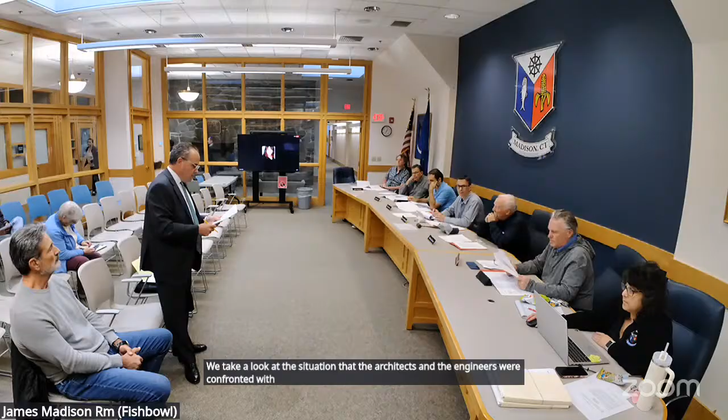Specifically, the lot itself is non-conforming in lot area. It's 9,275 square feet, where 10,000 square feet is required. The minimum shape that needs to fit in there is an 80-foot square, only a 42.8-foot square fits.

Most importantly, and notably, the lot width here is 42.4 feet, where 80 feet is required. So if you look at a 42.4 foot wide lot and you take two 12-foot side yard setbacks, taking 24 feet away, you're left with a building envelope that is 18.4 feet wide on a waterfront lot. I haven't seen one with that narrow of a building envelope, and it's pretty easy to see when you just look at the GIS map for lot 23 here.

The lot next door has a flange out, so it has more buildable area out near the water. And just a simple drawing that I did on our site plan, which is part of the record.

Do we have those materials? Not my markups, I'm happy. I'm just showing them to you now. Okay, you have this plan. If you're presenting them with markups, they do have to be submitted, do they not? I can submit them, yeah. Sure, I mean, it's more—I think they just give context in terms of the overall lot and the building envelope being very unique.

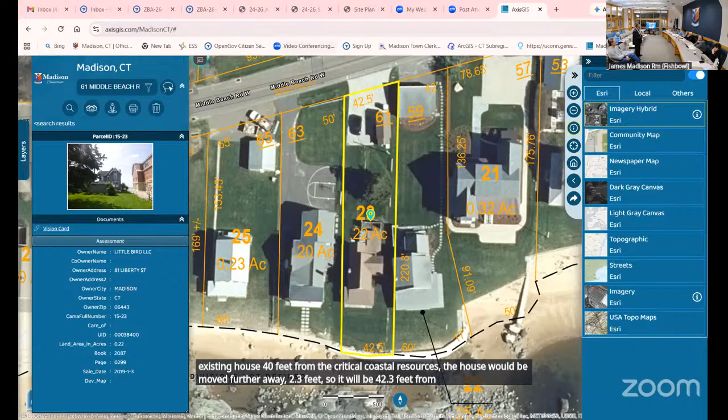In order to do all that, the variances required are the two side yards, 7.2 feet on the east and 8.1 feet on the west. Those represent reductions of existing nonconformities of the existing house. The critical coastal resource setback, section 2.17, although we're making it better and further from the house, 50 feet is required and we are proposing 42.3 feet. So those three variances we're requesting represent reductions in existing nonconformities.

The remaining three are ones we typically run into when we have a situation like this: a unique shaped lot and the need to raise to FEMA standards. We have a 5.9 foot average elevation here, and so we have two height variances: one for average building height, we're requesting 32.5 feet where 28 feet is allowed, and for total building height, we're requesting 37.3 feet where 36 feet is allowed.

The last one is floor area. I've been in front of this board seeking floor area variances in FEMA raised situations because in this particular proposal, we have 1,354 square feet, which is area beneath the lowest point of the first floor joists once raised to FEMA. Our regulations, when you close it in, require that to count toward floor area.

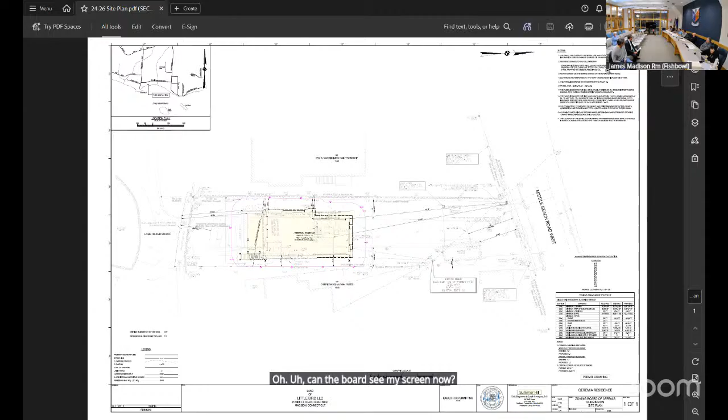Okay, so this is the site plan that was submitted as part of the package. I don't know if you've had a chance to take a look at it. I'll zoom in a little bit here for orientation. Middle Beach Road West is on the right of the sheet and the sound is on the left, and north is pointing to the right. Yeah, there's the north arrow there.

So the house is pretty straightforward, not a lot to tell you, but the house is oriented north-south along the same lines as the existing house, and the new house is also moved northerly, away from the water, away from the sound, just a hair over 2 feet. The limits of the new house are shaded in yellow on the plan. These purple lines and numbers are for the computation of the average grade elevation, which is also on the plan, I'll zoom back out, on the right-hand side of the sheet.

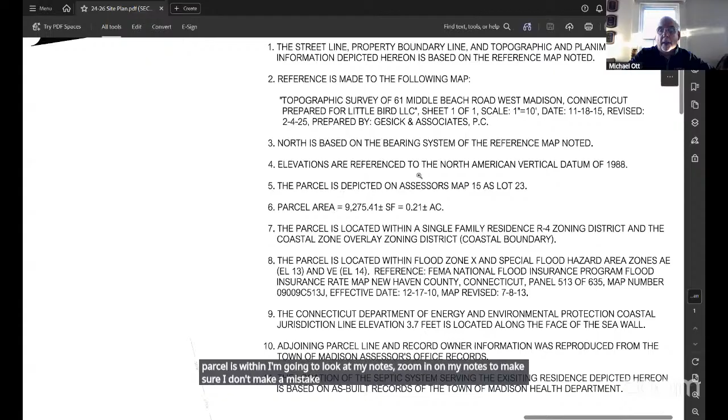The coastal resources on the site are general coastal resources, which are applicable in all municipal coastal site plan applications, and coastal hazard areas, meaning the special flood hazard area zones that the parcel is located within. Bear with me one second. You can see that the parcel is located within both an AE elevation 13 special flood hazard area zone, as well as a VE elevation 14 zone, identified in note 8 on the sheet.

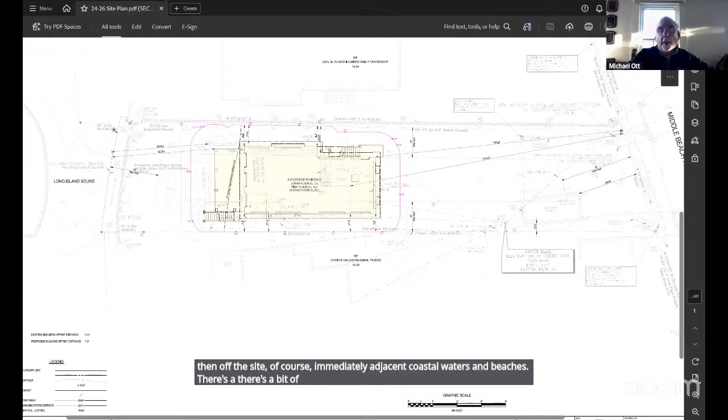So again, the coastal resources on the site are general coastal resources and coastal hazard areas, the special flood hazard area zones, and then off the site, of course, immediately adjacent coastal waters and beaches. There's a bit of a beach along the frontage. I think that's really it in a nutshell. There's no anticipated adverse impacts to coastal resources by the project.

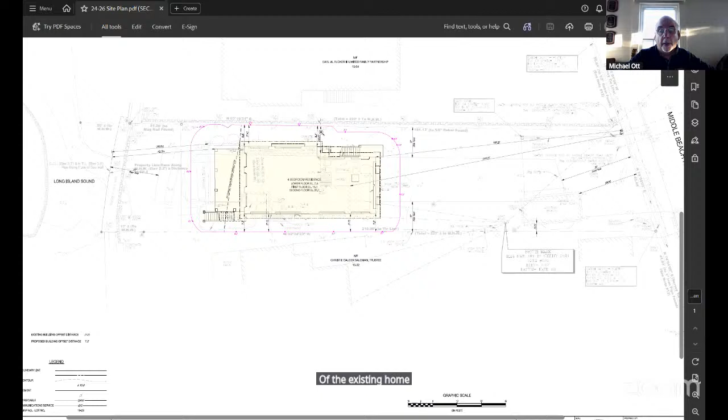This is pretty straightforward, it'll be the demolition and removal of the existing home and the garage up front, as Attorney McCann explained. I can zoom in a little bit. I don't know how clearly you can see this on my screen, but the garage is here, where my cursor is moving. As you can see, it's very close to Middle Beach Road West, and as Attorney McCann explained, it's partially within the front yard, which is not allowed under the zoning regs.

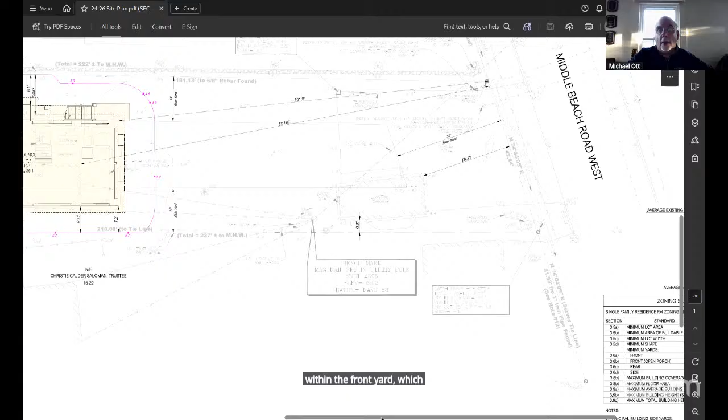I think that's it, again pretty straightforward. I'd be glad to answer any questions the board may have.

So I have a question. The elevation of the first floor due to FEMA requirements, what is that elevation?

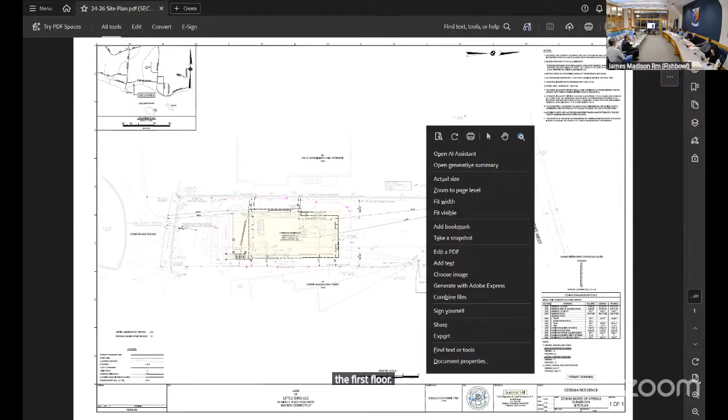You can see, I'm zooming in here, hopefully you can see this. And Dillon, the architect, can jump in here also, but because the new home, as well as the existing home, is partially within the VE elevation 14 zone, under the town's floodplain management regulations as well as FEMA's regulations, that means the entire structure has to conform with the more conservative zone, the VE 14 zone, and that drives a minimum first floor elevation of 16. As you can see, we're just a tenth over, a little over an inch over the 16, at 16.1.

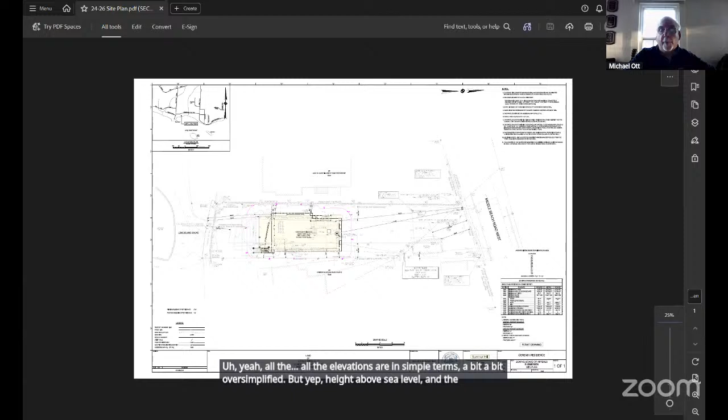What's the meaning of the lower floor elevation? That's height above sea level. Yeah, all the elevations are, in simple terms, a bit oversimplified, but yep, height above sea level. That lower floor, as Attorney McCann described, is the enclosed area below the base flood elevation that can only be used for parking, storage, and access to the upper floors of the building, as you know.

So basically ground level is 7 feet above sea level, in fact. 7.5, yes. Well, we've got to be up to 16, so you need 9 feet roughly from the ground. And again, Dillon Parker, the architect, I'm sure he's going to explain that in detail when he presents to you.

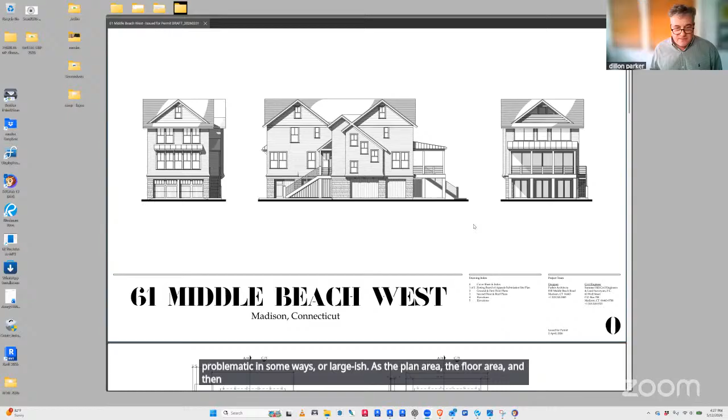for the variances that seem to be problematic or large-ish are the plan area, the floor area, and then also the height. So for that, I thought it might be appropriate to walk through the plans.

As both Chris and Mike have described, the ground level plan on the right here has two garage doors in it. It is constituted of structural piers of concrete that lift the whole house up, as we've described. Then there's a storage area in the front, with a little bit of access on the interior so you can come in and out.

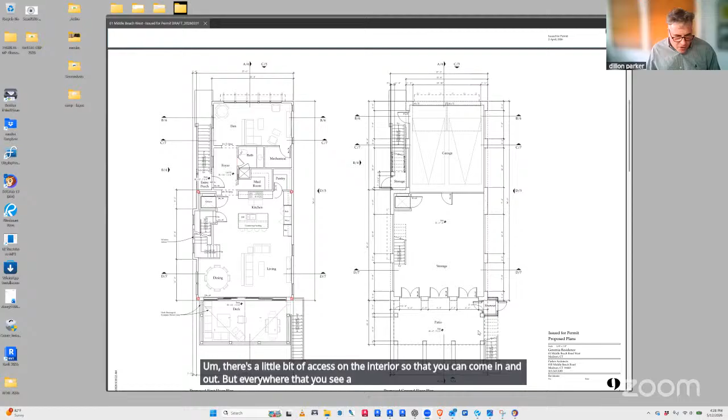But everywhere you see a thinner portion of wall - why can I not zoom? Oh, here it is - everywhere you see the wall thinning out like this, if it's not a door, as it is in this location, it's a breakaway panel. The structural engineering of that will allow a storm surge to just take it through and not knock the house over.

So we like the infill panels, as Chris described. To see a house just standing up on stilts is, I suppose, common architectural language in some places, but it isn't actually common in Madison. So we've made some effort to try to make the house look like a house that isn't just up on stilts.

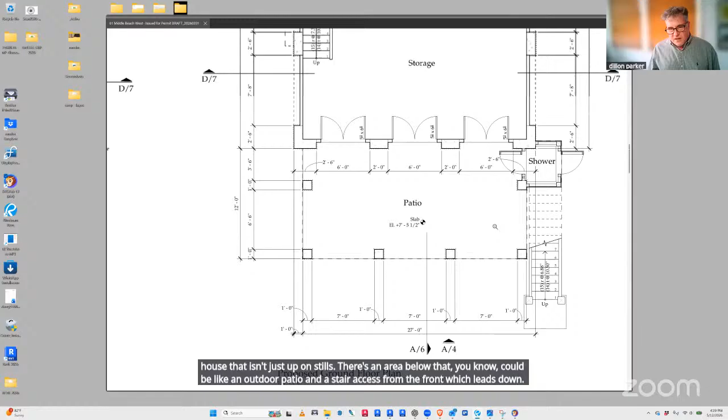There's an area below that could be like an outdoor patio and a stair access from the front, which leads down to the shore. But again, all this area here is enclosed, but it's technically not living area - it's unconditioned space, so it's not like the rest of the house.

The rest of the house area, we had to walk a fine line of balance between fitting on the site and making sense, but also providing the client with the function they want, with the program they want.

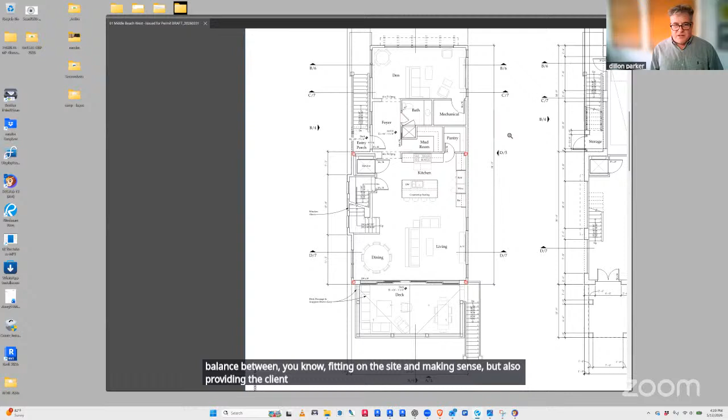And in doing that, I would say this is kind of a conservative house. I mean, there aren't any areas of it that are especially large or grandiose. So you can notice here on the first level that you come upstairs to a fairly modest entry. There is a den room in the back for TV watching.

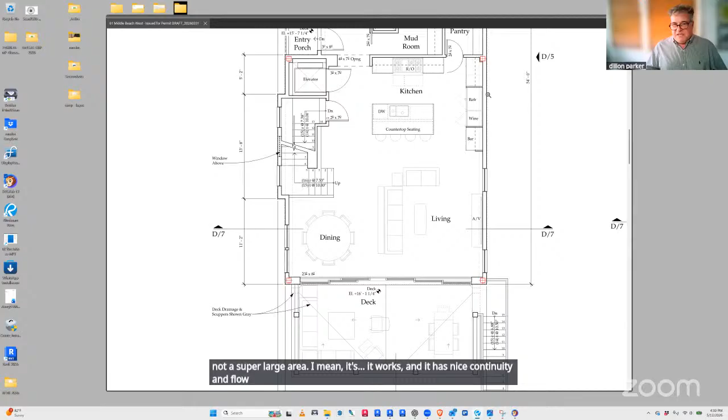There's a modest half bath, a mechanical space that we need for the building. The kitchen, living, dining is not a super large area - it works and has nice continuity and flow, but it's by no means oversized or grandiose. And then it opens up to the front out to a deck so the client, his family, and their guests can take advantage of being out there by the water.

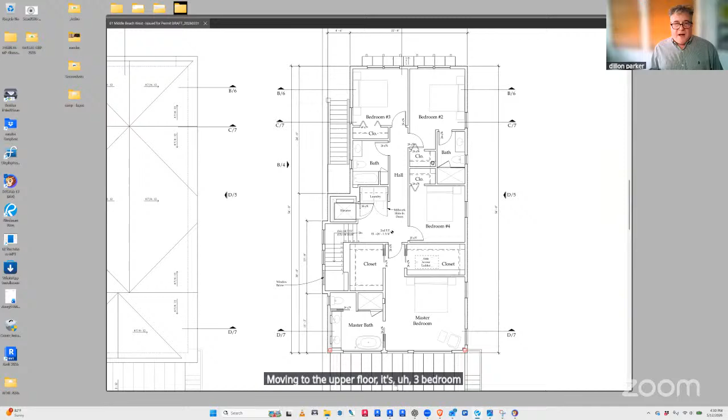Moving to the upper floor, it's 3 bedrooms. Again, just for the constraints of the house, bedrooms 2 and 3 in the back face out towards the north, towards the road, Middle Beach West. They're actually rather small bedrooms by most people's standards - they fit tightly in the space, but they're a little on the small side for the kind of standard, quality, location, and type of residence.

There's an ensuite bath and a shared bath, and the master suite actually has its own closet and bath. Actually, let me back out - oh sorry, it's 4 bedrooms, I forgot. There is an inboard bedroom here, also not extra large - these are all modest bedrooms.

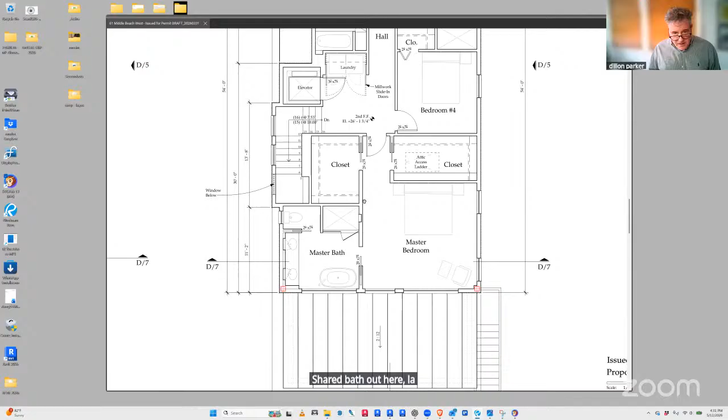Shared bath out here, laundry on the floor, and then a master suite in the front that looks out to the ocean, to the sound. A couple of closets, and then a medium-sized master bath, but efficient and tightly put, and a nice size master bedroom, but not overdone.

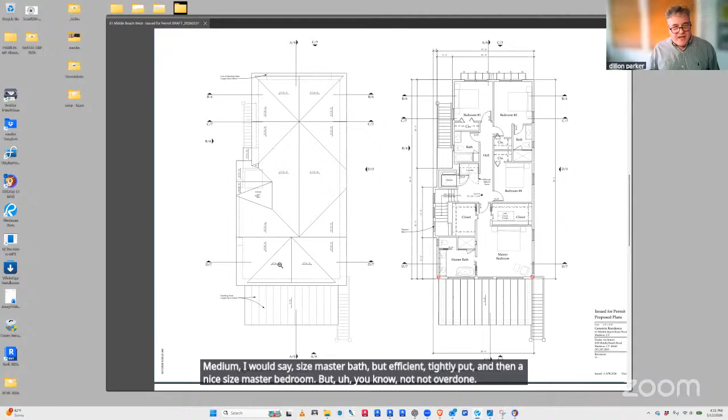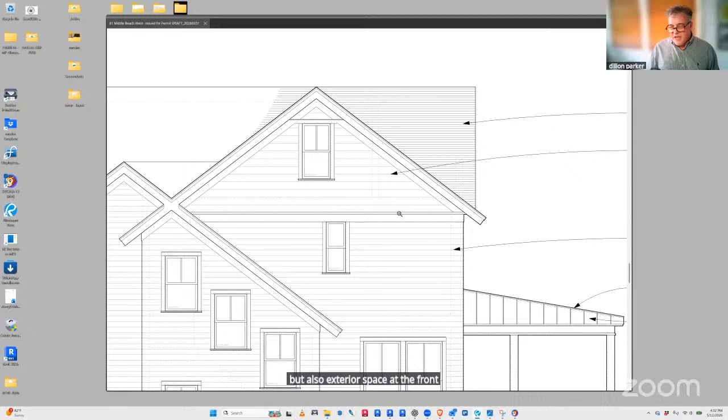There's a roof plan here. There is attic space above this, which I can describe a little bit in the elevations. One of the key things, and Chris raised the issue already, is at the attic level there's room up above for mechanical equipment, but also exterior space at the front for exterior mechanical equipment like the compressors you need to run heat pumps for your HVAC system.

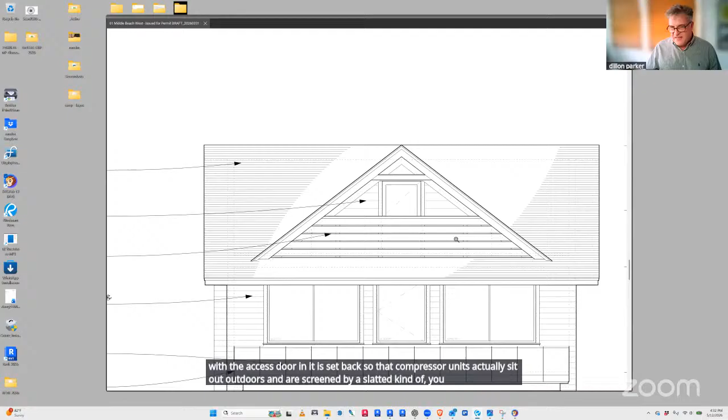So the strategy here was to find a place that is exterior to the building but shielded from anyone's view. This would be the view from the west neighbor. So the roof here is in the way of the west neighbor seeing any of the outdoor mechanical equipment. On the front, under the gable, it's actually a setback. This wall back in here with the access door is set back so that compressor units sit outdoors and are screened by a slatted fence element that prevents anyone from seeing them directly. And the roof comes down on both sides, so the only acoustic exposure is out in the direction of the sound and not laterally to either of the neighbors. So that's kind of how that works.

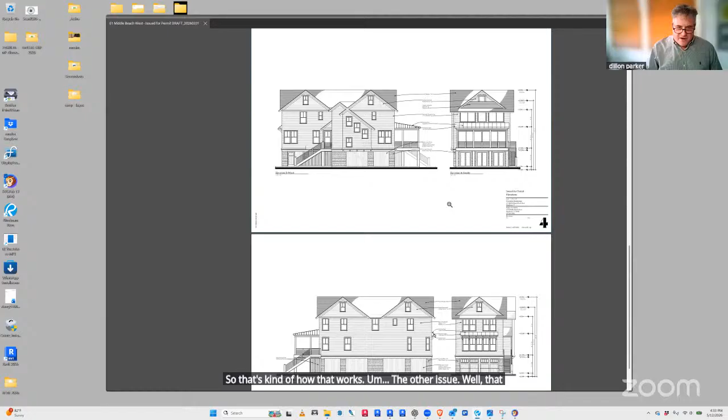The other issue is that the variance is being asked for about height. We took the approach with this building that we wanted very much to look contextual. The pitching of the roofs is not super steep, but steep enough that it's consistent with lots of other buildings all along Middle Beach West and throughout Madison, with the exception that we had to go a little shallow over here for the front porch, but that's not unprecedented either. The overall massing of the house, we wanted it to look in keeping with the houses around it.

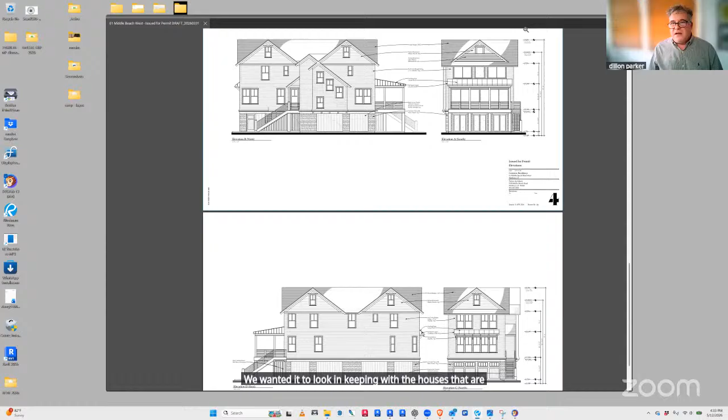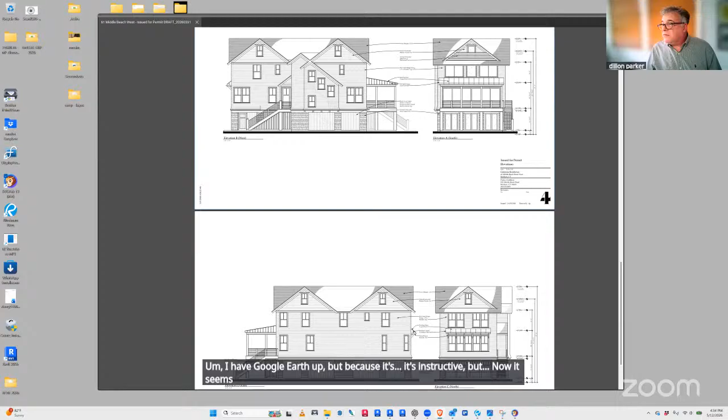Where did it go? Hold on one second. I had it on you, and it disappeared. No, I had Google Earth up, because it's instructive, but now it seems to have gone somewhere. Oh, here we go.

So that's kind of where we were headed, and those were really the big aspects that we thought were worth talking about. And with that, I'd throw the floor open to questions.

No, Attorney McKeon, did you have your presentation? Start asking questions or? At this point, I field questions from the board, from the public, from anybody.

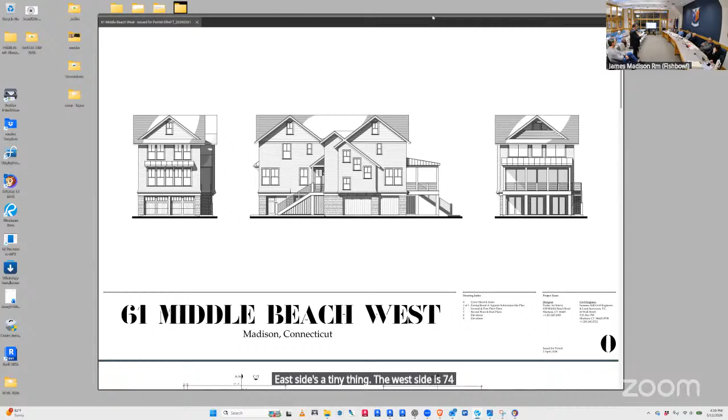But when you look at the location of the house, it is being moved further from both neighbors. You're only talking about a 12-foot side yard setback here, so a foot means a real lot in this neighborhood. On the east side it's a tiny change. The existing house currently is 7.1 feet on the east and 7.4 on the west; it's going to 8.1. So the house is being repositioned on the lot.

Not to mention further from the coastal resources. But I'm not going to disagree with you that removal of the garage is a significant factor here in making the lot more compliant from a zoning standpoint. No question about it.

In order to reduce the nonconformities further, was there any consideration to move the whole house back 7.7 feet to meet the 50-foot coastal resource requirement? Would that be a consideration if the house is being completely rebuilt? I can let the architect answer that, but I think I know the answer: the houses are built along that road, and if you move your house back, you're compromising your ability to see the water.

You're compromising your ability to see the water. You have other houses located closer to the water. There's also the idea of keeping the houses with some degree of consistency along that street. Perhaps Dylan could weigh in, but in fact the neighbor to the east raised the question about whether you were going to move the house closer to the water for that very reason.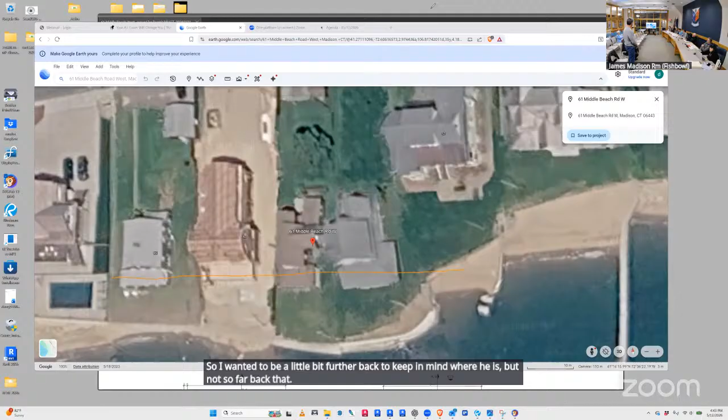I was okay with that. I wanted to start where he had set a precedent — the new Earl Puckett house set precedent by building new, and I kept it by moving mine back too. To put my house way behind that, I don't think anybody in the whole strip, if you spread that out on Google Maps, would do. Nobody's done that. So I wanted to be a little further back to keep in line with him, but not so far back that it would really jeopardize the view and be weird relative to the adjacent homes.

Where's the septic in this? Is it on the street side? No, it's on the other side, the water side. Oh — and that septic was designed and engineered less than 6 years ago. It's a brand new septic, code compliant. And you comply with coverage, right? Yes, I did.

Steve, do you have any?

You like that? I always have things. I just never.

I think a question just popped up, because Mr. McGinn, you did just bring it up. How high, if for whatever reason we ended up denying it, does the applicant have the capability of raising the existing house without it currently?

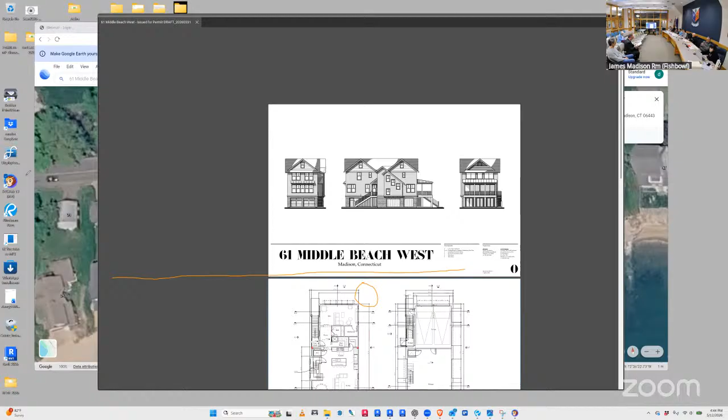It is in my narrative, but the existing house could be raised to 2 feet above the required FEMA elevation, so it could have an average building height of 32.8 and a total building height of 37.3. And we're seeking 32.5 and 37.3, so essentially the same on the total height.

Okay, but regulations allow for 2 feet above FEMA, and in essence currently aiming for almost FEMA. Only as to existing houses, yes. Got it, okay, I'm trying to understand.

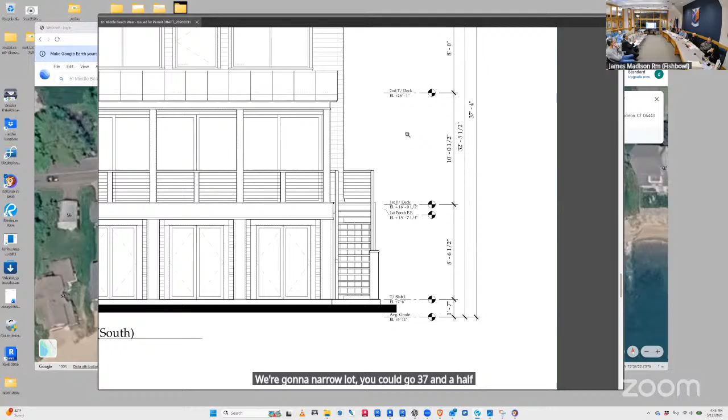And that's without taking into account the narrow lot reduction. Does that change the numbers? If it were in a narrow lot, you could go to 37.5 feet. But I do think under section 2A 1.5, which is raising of an existing house, you can go up to 2 feet above the FEMA level and 2 feet above the permitted height. It is addressed in that particular reg. Floor area is not addressed, but height is.

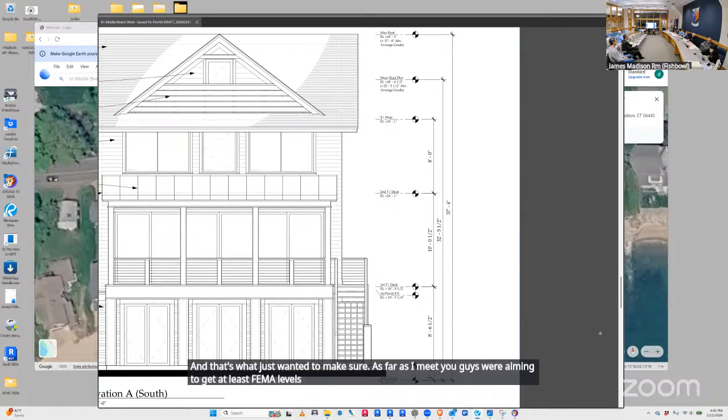Okay, so those are the numbers of what you could raise to, and that's what I just wanted to make sure, because as far as I knew you guys were aiming to hit at least FEMA levels, if not a scooch above, to presumably make room for cars or that kind of aspect. But you did just mention that you had the legal right to go even higher than that. It was like, okay, how much higher than FEMA are you normally allowed to go? So thank you, sure, as far as that one.

Now, if you didn't have the breakaway sides on the lower floor, does that floor area still have to be counted? No. Okay, so it's the breakaway sides that, wanting to have those sides is what makes that have to now be a factor. Correct.

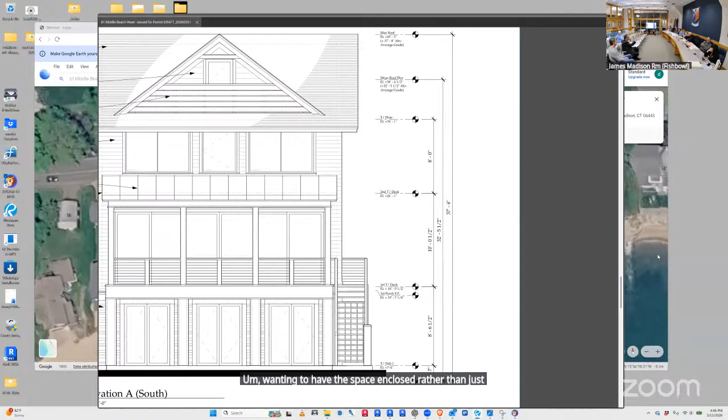Wanting to have the space enclosed rather than just a clear shot of a house on stilts. Historically Madison has had houses on stilts, so I'm used to seeing them that way. So just making sure I'm fully understanding, wanting to be able to enclose that is indeed making it an interior space, and therefore accepting that floor space is going beyond what is currently allowed, and accepting that fact. Okay, just making sure I'm fully understanding it.

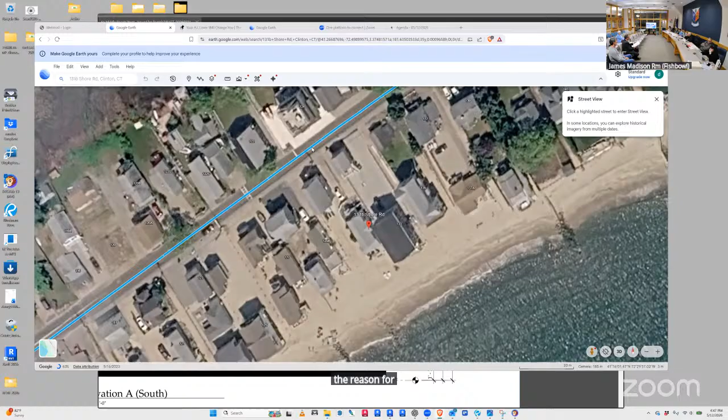The reason for that, and sorry, that was the question I had. Okay, and we already talked about that aspect. I think at this current moment I've run out of particular questions to inquire about. I'll probably have something pop in my mind later.

Sure. So I did want to address, in your submission of the application, Attachment A as it was called, you have 2 paragraphs at the end, the traditional hardship conclusion. I don't know that I would fully agree on the statements in those 2 areas.

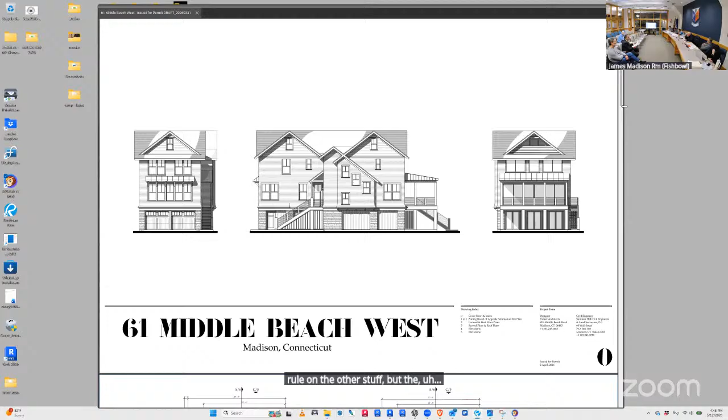We may just rule on the other stuff, but the fact that the lot is narrow doesn't automatically assume, well then we can go build something. We want to build something larger there, and the lot's narrow, so we can just do it. Is almost what it sounds like. It's almost an as-of-right thing. But because it's too narrow to have a normal looking house, we get to make it normal looking.

And I'm not sure that since there is already a house there, and yes it has some nonconformities, but that doesn't necessarily, in my mind—maybe you could make me see it differently—justify a traditional hardship.

But before I pass that on to you to address, I want to address the next paragraph, which talked about variances being consistent with the coastal resiliency plan. And thus your conclusion says it's clearly consistent with the comprehensive plan of the town. And you only addressed there the resiliency effort in making height restrictions flexible in case of home elevations. So in that regard, that does address some compatibility with somebody's plan in the town, but it's not an official adopted standard, just because a coastal resiliency plan came out of a committee.

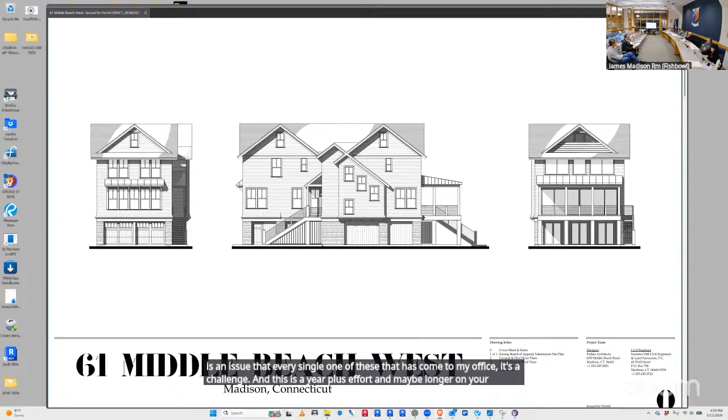This is what you're talking about — needing height and floor area under our current regulation. Hopefully they can change, but that is an issue that every single one of these that has come to my office is a challenge. This is a year-plus effort, maybe longer, on your part to try to come up with some reasonable balancing of those factors.

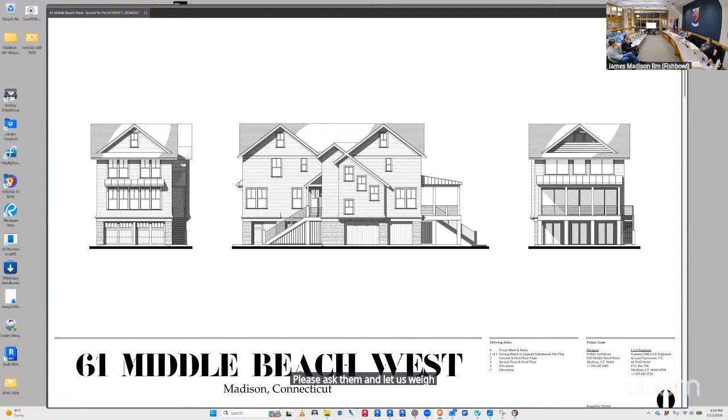The only other thing I wanted to mention is, to the extent there are questions and discussions you want to have like this before you go to deliberation, please ask them and let us weigh in, because we obviously can't once you close the hearing. That's what I was asking. Do we have anyone in the audience who'd like to speak in favor of the application?

Cecilia Pfister, I'm at 73 Middle Beach West. I have a question and I have comments. The question is about the third floor — it seems like it's more than mechanical space. That's huge, it's the size of the house. It says it's added only a ladder access, but that view out the front seems a waste for mechanical equipment. It looks like it could be living space, a porch.

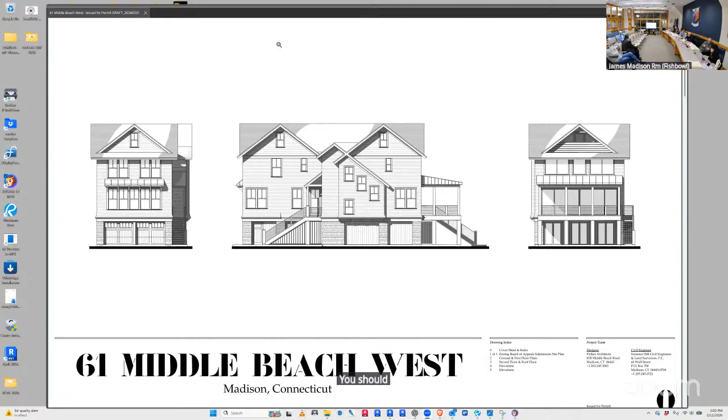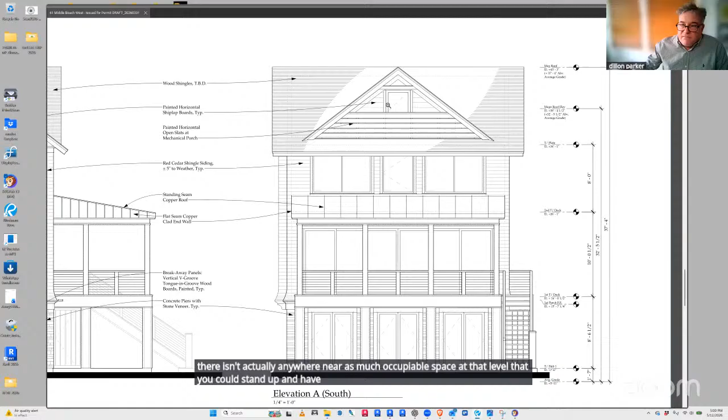You should say how high the ridge is, the floors. Sure, so we have not included a section per se in this set of drawings, but there isn't actually anywhere near as much occupiable space at that level that you could stand up and have a code-compliant head clearance. So it is definitely specifically for mechanical, and the hatch door that goes out to it is only about 5 feet tall.

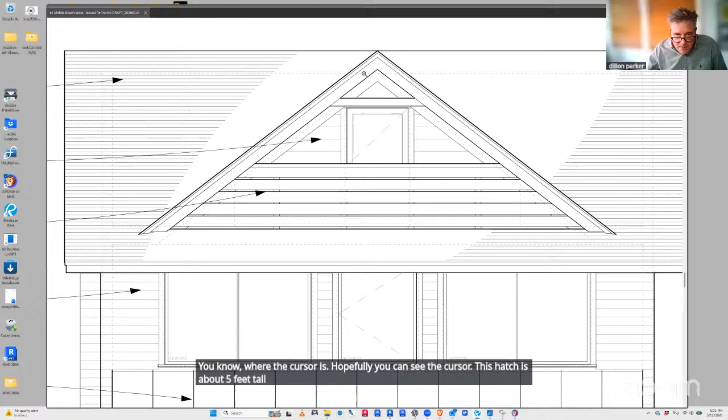I'm sorry it isn't clear in this drawing, because this is an elevation drawing and not a section, but under the ridge, which is this dashed line up here, if you can see that, you could have some headroom clearance there, but the floor line is down here, where the cursor is. This hatch is about 5 feet tall, and in the middle, under the gable that runs into the drawing away from us, you would have about 2.5 to 3 feet either side of the center line that you could comfortably walk and not hit your head.

So, no — a section would explain this more significantly, but it's not a layman's kind of drawing, and it's not one that we deemed particularly useful for this part of the application.

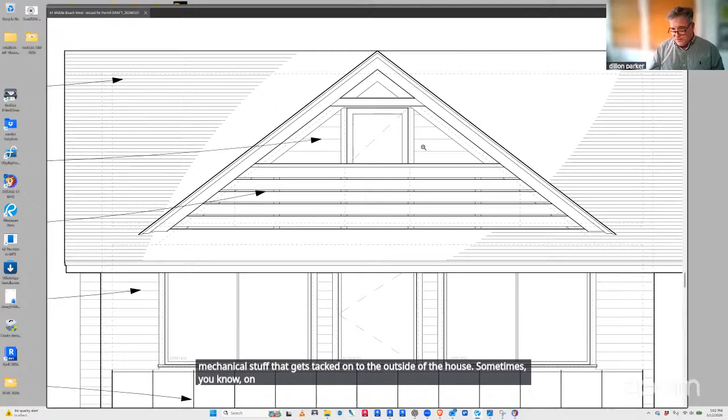Obviously, we will be generating those for construction, but I hope that speaks to your point. And again, I'll reiterate, I've seen lots of projects where mechanical stuff gets tacked onto the outside of the house. Sometimes on a sidewall next to the neighbor, it needs to be elevated out of the FEMA flood, hurricane level as well.

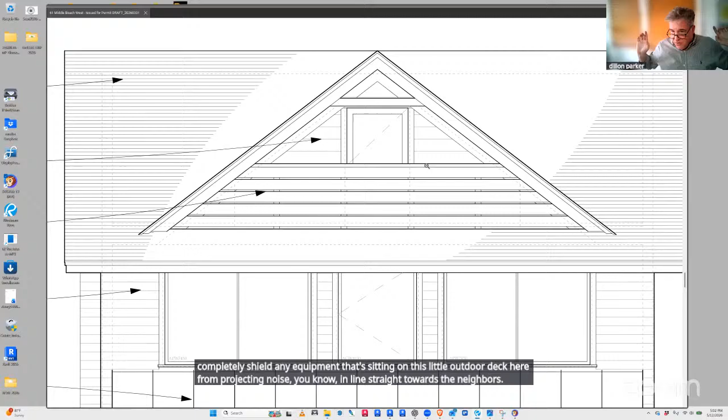And sometimes that equipment makes some amount of noise. So actually having a space for outdoor equipment that faces out to the water and is shielded from projecting noise—noise is more or less line of sight. If you can see the machine making the noise, you probably can hear it. But here, the roof on both sides completely shields any equipment sitting on this little outdoor deck from projecting noise straight towards the neighbors, where their front porches look out to the water. So any noise generated here is basically headed only out towards the water.

So these are all things we worked hard to get the right balance on. We also need to use this space for ductwork, because the floor to ceiling height here isn't very high at the second floor—it's got kind of an 8 foot clearance, so we can't drop the ceiling to run ducts under the structure of this attic level floor. Those ducts will run above the structure of the attic level.

Well, I won't call it a floor—I'll call it that because I don't want to be mistaken. It's not a level or a floor, it's a structural deck. Because it'll have equipment on it, it has to be structured. That equipment will be mechanical equipment and ducts.

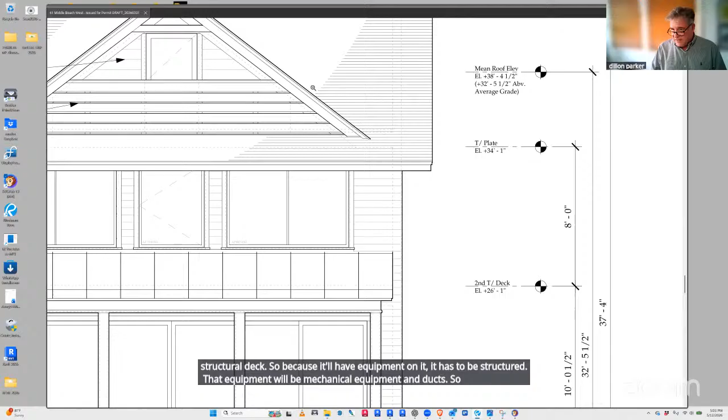So that's the point. But maybe if I can use the annotate tool, maybe I can highlight a little bit the space where a person wouldn't hit their head. Can everybody see that? So, center line of the building, a couple of feet either side. Now, that space occurs—let me zoom out here.

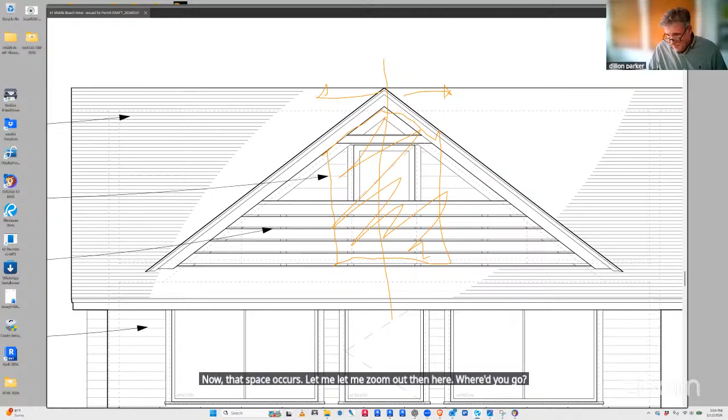I can try to quickly show where it would be in the roof plan. Let me annotate again and clear this—sorry, this feels very ad hoc, I hope I'm not... So, here are the ridges.

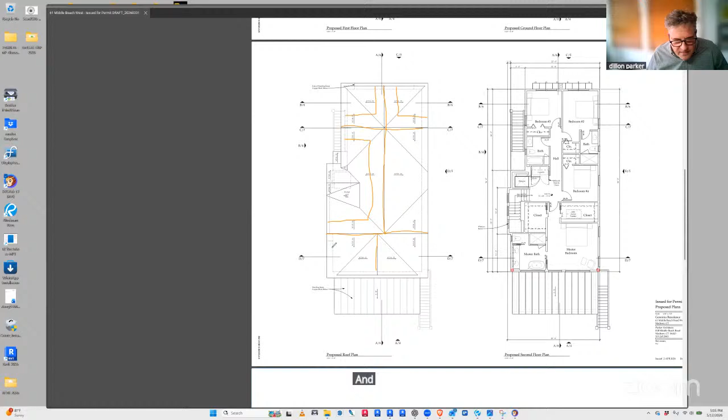Can I ask—did you have a question or a comment, ma'am? I'm concerned about the size of the building, the replacement. It's a small cottage, I get it, I've got a small house too. And it's not compliant because it existed before the regulations, but it's still not compliant. They're still pushing the boundaries with a new building that's bigger. Can't deny it's not big.

This is one of the 3 smallest lots on the water side on Middle Beach West. Of the 17 total, it's one of the 3 smallest. But you want to put in a 4,000 square foot house, which makes it one of the largest on the beach. I think you're disregarding what's there and encouraging overbuilding, if we disregard all the regulations we already have in place.

I think there are just too many variances being asked for to build a large house. A smaller house could be built. Saying 'nobody would buy it' shouldn't be the goal. If you want to build a house for yourself, that's the goal—not 'I want to build a house to sell, make money.'

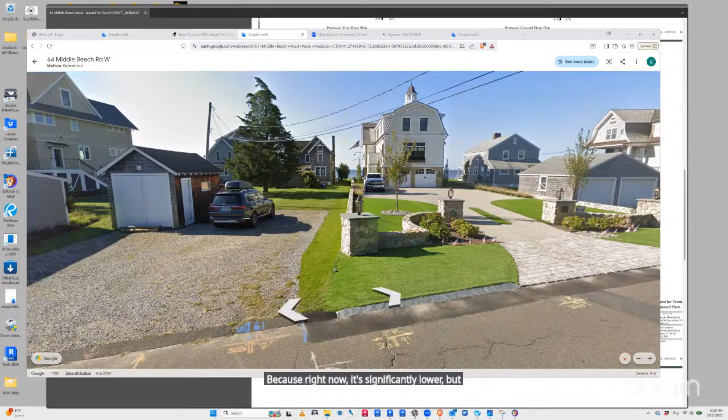They were on Middle Beach Road West, 63. I live at 64, but Tucker's, I believe, is 63, and I believe the house you're talking about is 61, correct?

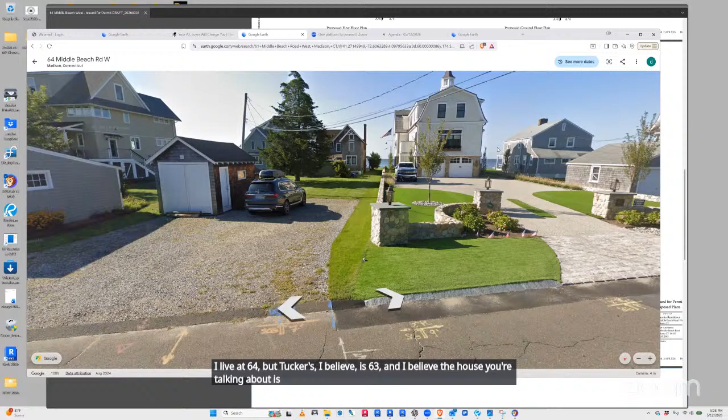Mike, do you have any comments? Well, it's a difficult lot because it's so small. I understand that. It looks like the architects have spent a lot of time trying to make it look very nice. It can only go so big.

Okay. Well Mark, yeah, Mike, to your other question, I don't think we have the answer to that. That was my only question.

Thank you. By the zoning chart for when you approved the Tuckers, the total building height was 34.94. I just want to clarify that. That may very well be what it is, but in order to really understand what that means for somebody across the street, you need to know what the average grade is.

Around the house. So I know that the Tucker's elevation, there's a retaining wall between Brian's property and the Tucker's. It's a higher grade, so once again, it's not apples to apples.

It may be 34.5 feet high, but they built a retaining wall that had to go 3 or 4 feet high so far. Total building height, they have to go back to the site floor plan.

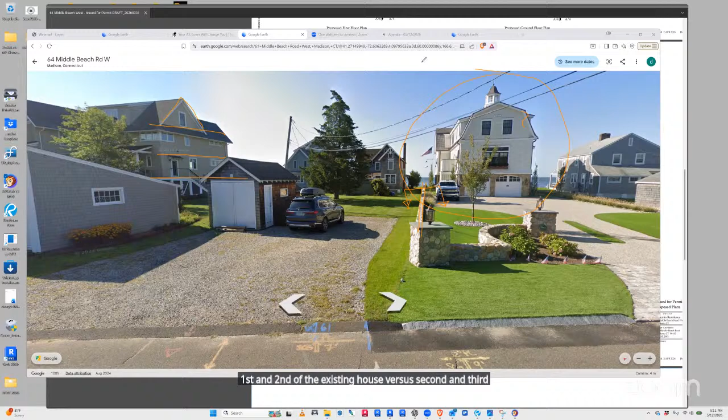Certainly. The square footage of the existing house, let's call it the first floor and the second floor - how does that compare to the square footage of the new house of the second floor and third floor? Not counting anything in the basement or first level, just counting first and second of the existing house versus second and third of the new house. The square footage, just raw square footage. Not counting the third, the upper floor, which is the mechanical floor.

I understand that. I'm saying, how do those two square footages compare? The new house, usable square footage is 2,708 feet. The existing house, existing floor area of the house alone is 1,432 square feet. That doesn't include the garage and the decks, which are also within setbacks.

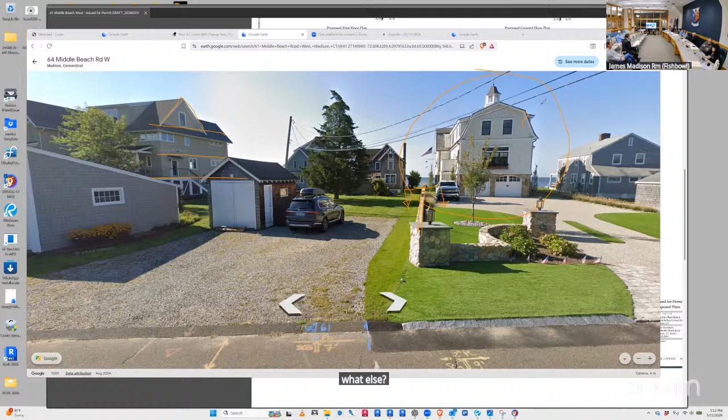The thing on 19 Parker Avenue, for 19 Parker Avenue, the floor area that was allowed was 59%. So on Island Avenue it was more. So I think the only issue with the increase in floor area, I'm thinking about this.

As opposed to saying, well, 18 feet wide would not give you the necessary room for bathrooms, and in order to get any kind of usable space, it's at least wider by 4 feet. The rationale as to why the house was made wider than 18.4, other than nobody could build that - that's my point.

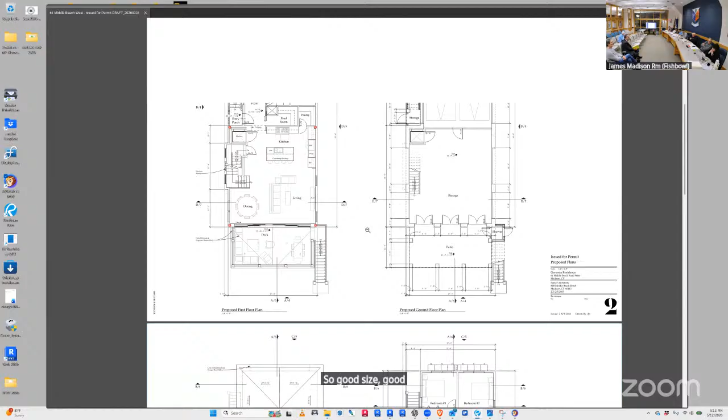And I think that's why the square footage becomes questioned. This is still a good sized home to squeeze into that barn.

Mary, did you want to? I had something, two questions or clarification.

I had two questions. The mechanicals, you cannot put them down on the lower level because of flood, so they're in the attic, which avoids asking for other variances, because you're not going to be able to fit them all outside. So that's why they went up in the attic, right? Okay, that was one thing I wanted to clarify.

And the footprint, again, is 1504, which is allowed, and it's going to be 1504, the footprint of the building. And we were saying that your allowed floor area is 2840. So even if we had regulations where we didn't have to count it, we would be compliant, right? Okay, unfortunately, we don't.

I just want to make sure. That's right, we would be, instead of 2840, at 2708. But in that 2708, there's mechanical rooms, right, things that take away from the actual square footage of the house. It's not counted. You're right, stairs and whatever.

And that's what Dylan's point was. We've gone through the floor plans, which we generally don't do much with, but these rooms aren't excessive. No, it's only 1500, the box is only 15. Okay, it complies coverage-wise. I'm sorry, and the plot is what? The coverage, the box or the footprint, it complies. It meets compliance.

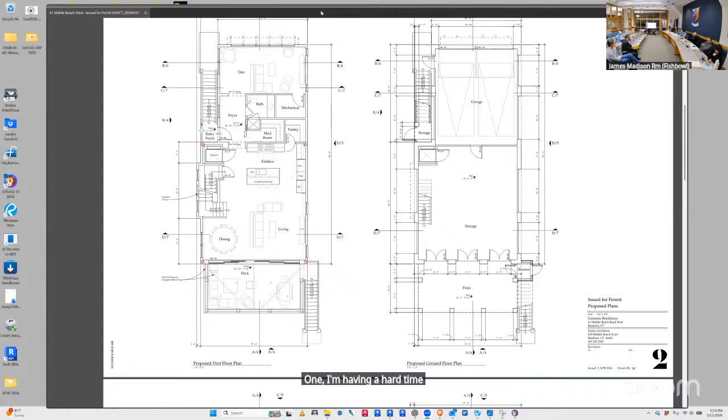I mean, myself, again, looking over and hearing everything, the vast majority of the requests in regards to the application, I'm totally for. The idea of being able to reduce everything that involves reducing non-conformities, I totally support. One, I'm having a hard time myself wrapping my head around and accepting, is the idea of the floor space issue.

Because that can be eliminated strictly by leaving the sides off the entire thing and not enclosing that bottom level. Whereas indeed, all the other houses I certainly have seen up and down Middle Beach, West, East, Middle, I guess there's Middle somewhere.

Yeah, there's a lot of narrow properties. A lot of people seem to prefer the idea of enclosing the space, and I get that. I assume those have that enclosed area as part of their floor space. They understand it and meet whatever the requirements are. Being able to enclose a garage, I absolutely appreciate that. The rest of the space, I have a hard time coming to terms with myself. But everything else, I love the idea of being able to get more houses up to FEMA compliance, to reduce the amount of damage that occurs, especially since we've been seeing larger, greater storms with higher velocity.

And the fact that you have a 5-foot beach wall there. My family used to have a house on the other side of town with a 10 or 15-foot beach wall. So we definitely appreciate the concerns about coastal damage that can occur from natural disasters. But it's only the floor space that I have a harder time trying to wrap my head around. That's where I stand on this particular issue.

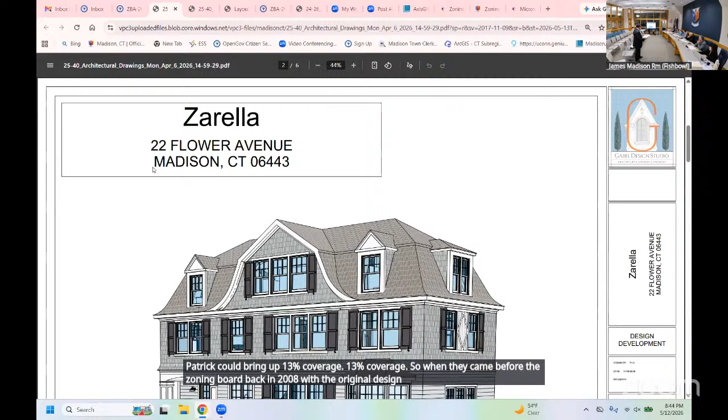13% coverage. So when they came before the zoning board back in 2008 with the original design of the house... talking about the original, oh, yeah, I don't know if you have it, I probably don't, if it's in there. Patrick, do you have the existing elevation of the house? Yes, yes, I do. Is it okay if I share my screen? Go.

So while he's doing that, when they came before the zoning board of appeals back in 2008 to get this house approved, they had to stick to that 13.14% coverage. That was sort of the way you got something done at the time.

So they built the house with 13.14% coverage. That was the variance that was granted back then, of course, the lot at the time was undersized for the R2, clearly wasn't 40,000 square feet. 9,749, but as you can see, this area right here is a raised concrete patio.

So this part is recessed. You can see the edge of the chimney here. So this addition is proposing to be built on this concrete patio, up and over, to make the house symmetrical. But the reason it exists in this fashion is because of the old zoning, R2, and the desire to keep it as far away from the coastal resources as possible.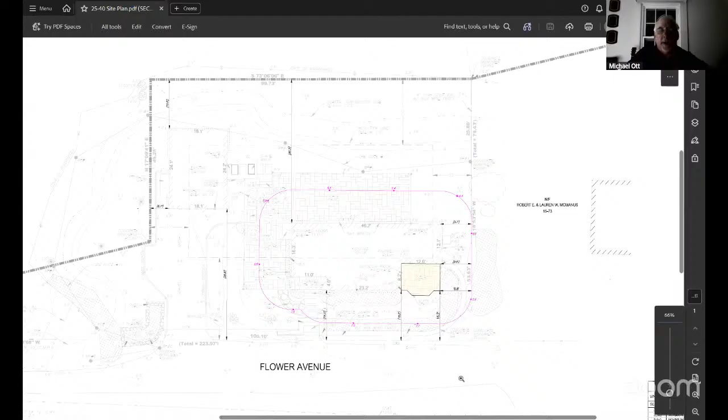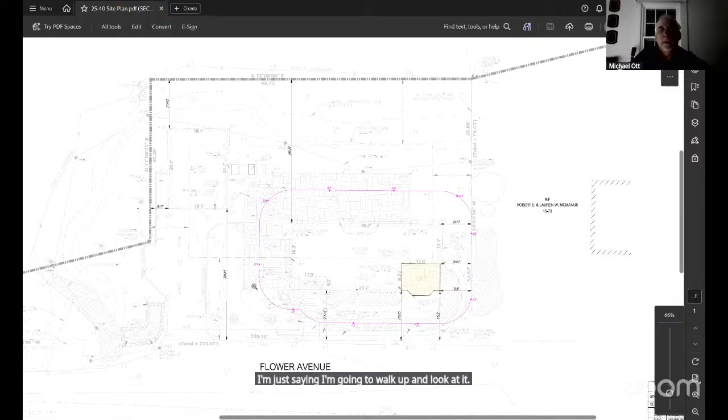This is Flower Avenue at the bottom of the sheet, just for orientation, and north is straight up on the sheet. I'm not sure how clear this appears on your screen, but— I'm sorry, go ahead, I think I can hear the board speaking. I'm just saying I'm going to walk up and look at it. Okay. It is a little bit difficult to see.

The addition, just like the previous application, is the small area shown in yellow. It infills that corner, the inset in the house, as Attorney McCann described. And this one I think is even more straightforward than the previous application. The construction is limited to that lower right corner of the house in that inset area. The coastal resources on the site are general coastal resources, coastal hazard area, because the site is completely within the special flood hazard area zone.

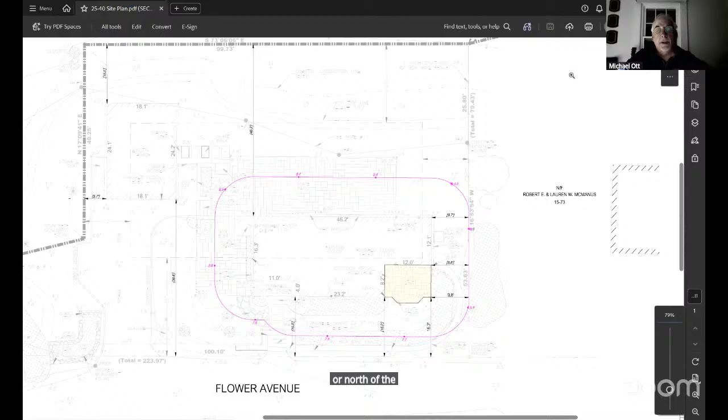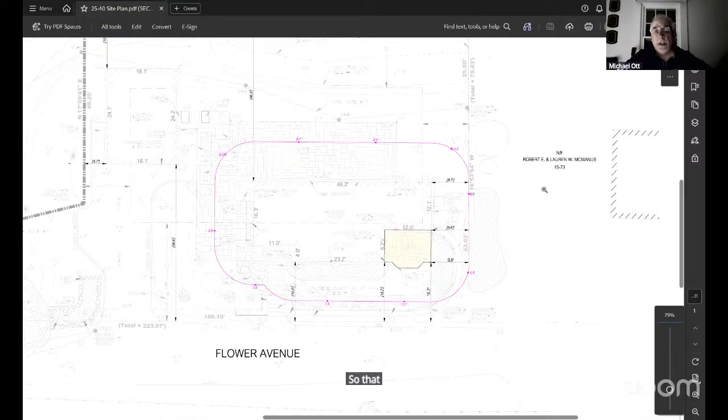On this site, there are tidal wetlands to both the rear, or north, of the existing house, and also to the east. And again, the purple lines are the average grade calculation, which is on the plan. So that's really it, hopefully this is clear enough.

I'm sorry, go ahead, I can't tell where the house is on this and where the addition is. Let me see if I can share mine, if it makes a difference. Okay, so this is the existing house.

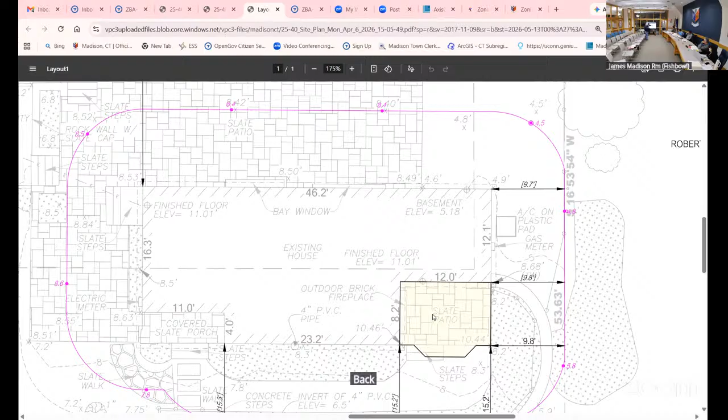So yeah, the existing is over here. The addition is a two-story addition, and then back over, because this part of the house is one story, so it's two stories up within the existing footprint. The only part that is being added to, which is realizing a little bit more coverage, is putting structure over this, because this doesn't count to coverage. If it had a cover on it, it'd count 50%.

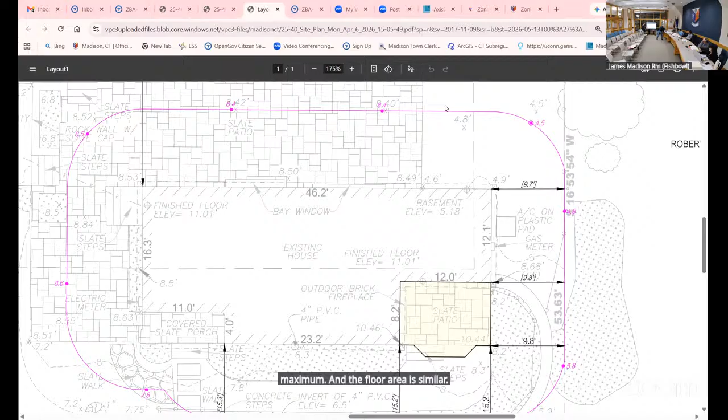This is patio. So with the addition—what's permitted in the zone for coverage is 1,552 square feet. With that additional area added, we're at 1,359, still well below the coverage maximum. And the floor area is similar: right now there's 1,969 square feet. Adding the floor area of the addition, we get to 2,341, and 2,920 square feet of floor area is allowed.

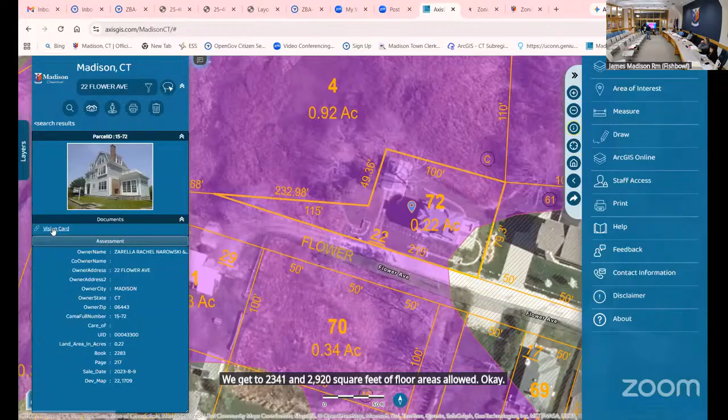Okay, I guess I just could not— that's a perfect picture of it. Yeah, I'm making it bigger. Oh, that's existing, that's existing. Got it, so the addition is up above the existing single level. Got it, okay, that's what I needed to know. I don't know if I stole your thunder, Patrick, but— not at all.

My turn? Hi, I'm Patrick Gable, I'm an architectural designer with a business located at 883 Boston Post Road in town. I'm going to share my screen.

I'd like to present this proposal for an addition comprising 372 square feet to this existing home. In the scheme, we utilize the original home's footprint and egress in a 2.5-story addition located over the current southeast patio. We figured this was the most logical and favorable location for an addition.

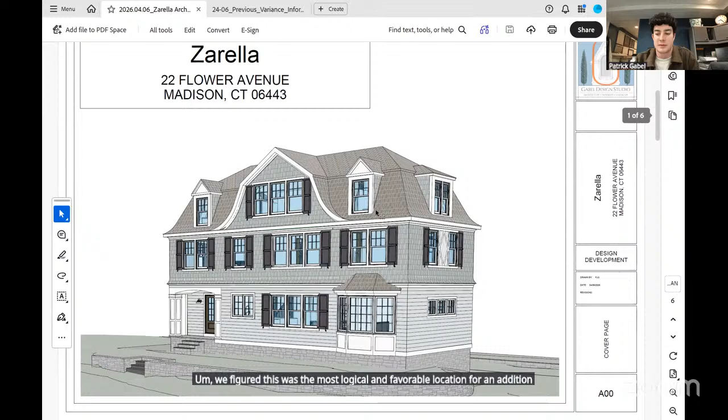As it's furthest from the coastal resources and creates balance to the architectural massing of the building. Through this minimal addition, we're not only restoring symmetry and balance to the facade, we're more importantly providing useful and practical space to a young growing family through the reorganization and efficient expansion of the floor plan, providing much needed living space to a formerly confined and restricted dwelling.

The current home coverage was legally non-conforming when it was located in R2, by way of hardship when it was constructed. Now that the home coverage and floor area are conforming after being redesignated to R5, we're only requesting the same setback variances that the original home was granted previously.

I will show you what we added. We just added this portion to the first floor level. If you see these hash lines of walls, that's all that's added, it stops here - these are the walls. We just made this living space larger, as it was only this big, smaller than a very small bedroom, for a living room with a family of 2 kids and growing.

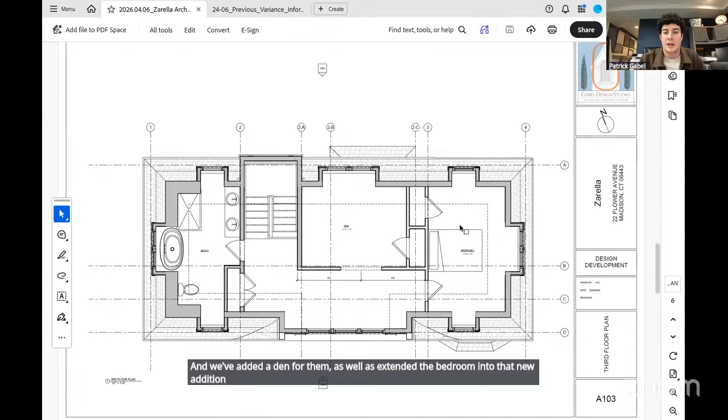On the third floor, this was also just 1 big bedroom right here, and we've added a den for them as well as extended the bedroom into that new addition in the roof. I can show you what it looks like in elevation - what we did was we just added this roof line to kind of balance the facade and extended these Dutch gambrels to that southeast portion of the building.

And that's about it on my end. Okay, thank you, Patrick. Thank you.

Just a couple more things - the case that I mentioned relating to the Fairfield case. What that case said is if you were just granted a variance saying you could build your house 15 feet from the road and 9 feet from the side yard, and it said nothing more, you wouldn't need to come back.

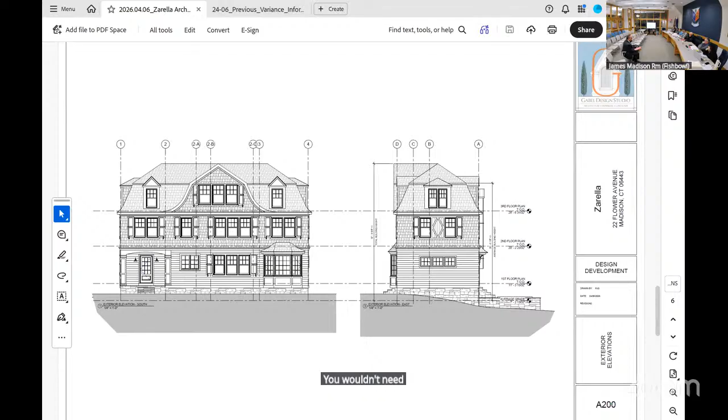Now, of course, this board limits their variances to the actual plans being presented and requires construction in accordance with the plans you're looking at tonight. But that's not always the case. In this Fairfield case, they were allowed to build a structure X number of feet from the road and from a side yard, and that's all it said.

The court upheld the issuance of a building permit to let them add to it, so long as they weren't exceeding those variances that they were granted. But it underscores the importance of making sure granted variances are specific to what you're being presented, because if you don't, you can get something very different than what's contemplated. By the way, that case is on appeal, so I don't know where it's going to end up, but that was the reason I brought it up.

That, together with the fact that if we were in the building envelope here, we wouldn't be asking for a variance, because everything is within the allowable requirements of the now R5.

Mr. McKee, can you just briefly review the coastal site plan with us? Yep, Mike, do you want to do that?

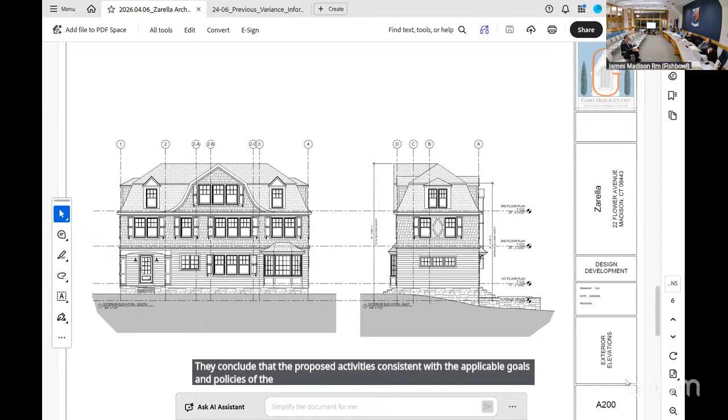I did get a DEP letter - sorry, it came in as usual very late today - but they conclude that the proposed activity is consistent with the applicable goals and policies of the CCMA, and potential adverse impacts have been avoided or minimized in accordance with statutes 22A 92 and 22A 106. They recognize that the addition is to the existing single-family residence, and the addition is entirely within the footprint of the existing house and the existing 12 by 8.2 foot impervious patio, so they see it as not creating additional issues from a coastal area management standpoint.

Did I cover that, Michael? Yes, yep.

Do you have any other questions? Anybody?